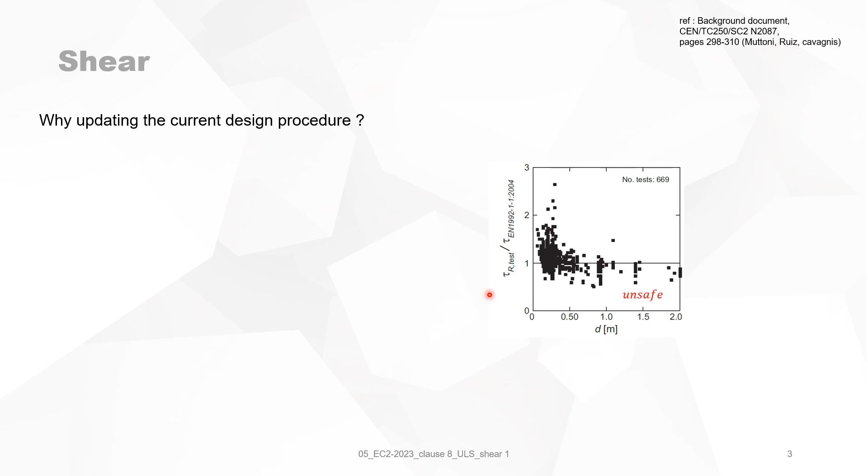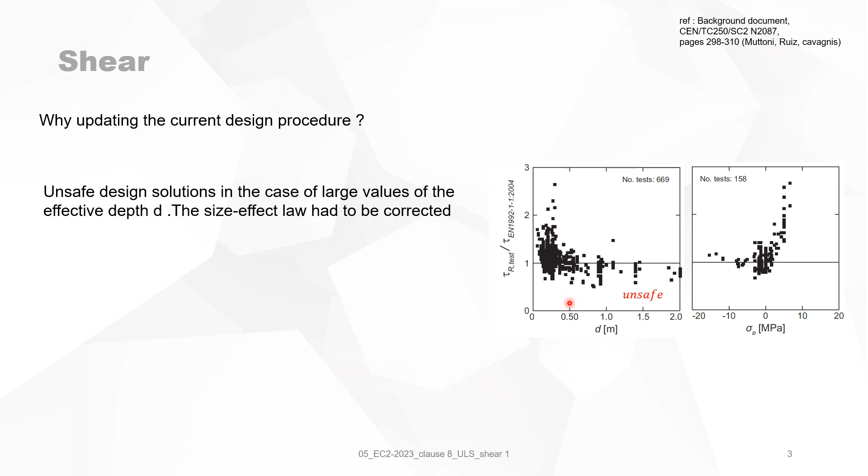On the other hand, when we have tensile forces, and you look again at the shear stress, you will see that this is too pessimistic, too safe, and too conservative for members subjected to axial tensile stresses. So that's in a quick way to explain why we need an update of the current procedure.

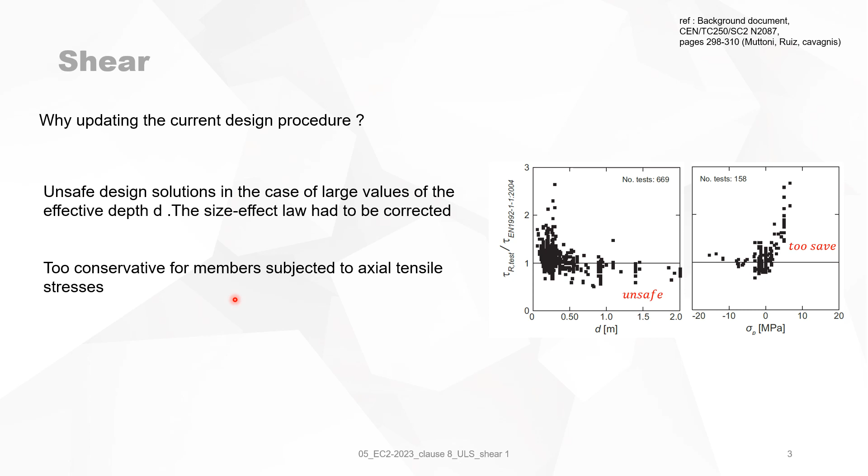The aggregate size, DG, which governs the aggregate interlock capacity, was neglected in the 2004 code.

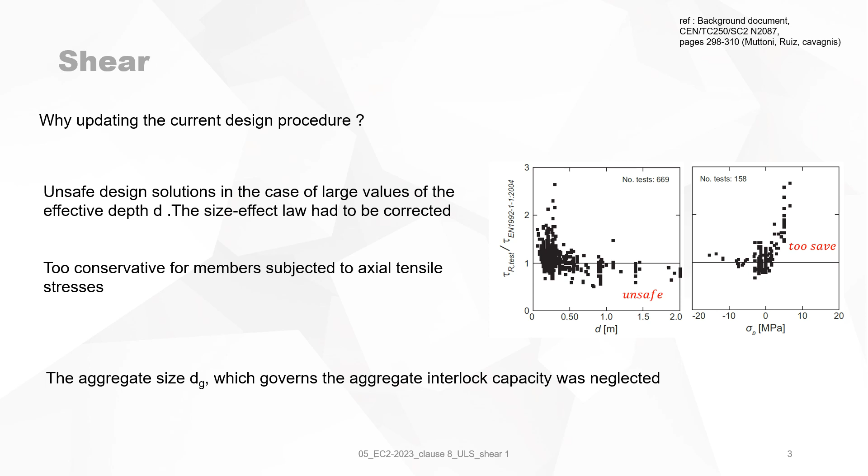So in the code of 2023, the shear resistance is based on the critical shear crack theory. We will first give you an overview of the procedure.

The first step in this procedure is that a detailed verification of the shear resistance may be omitted, provided that the applied shear stress is smaller than a minimum shear stress that the concrete can take. This first step is new, something which is not existing or not directly existing in the present Eurocode.

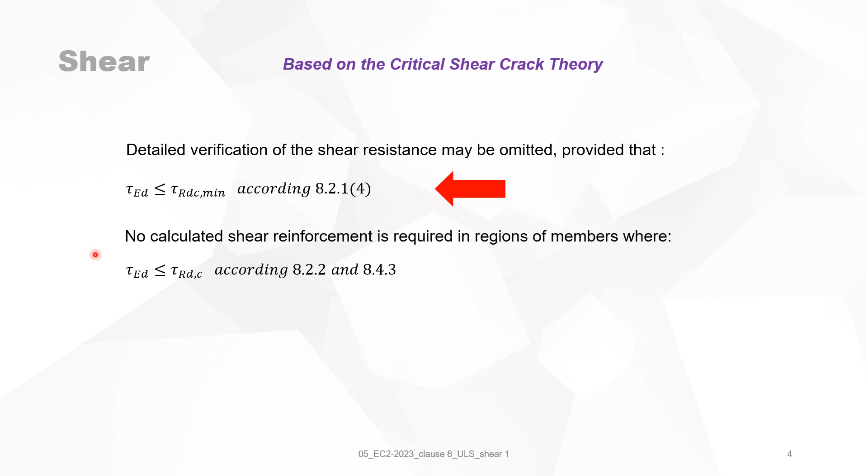The second step is that no calculated shear reinforcement is required in regions of members where the applied shear force is smaller than the shear force that can be taken by the concrete alone. Then the third step, if this is not the case, then you should apply shear reinforcement and make sure that the applied shear stress is smaller than the resistance shear stress.

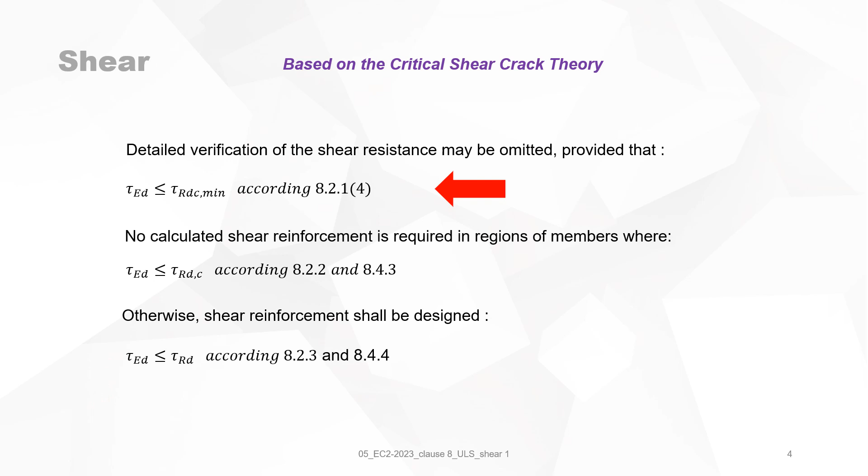First thing that we have to note is that we are talking in shear stress. We are not talking in shear force. That's also something that they put through in a consequent way.

The critical shear crack theory is based on a shear crack criterion, and this criterion is derived as follows.

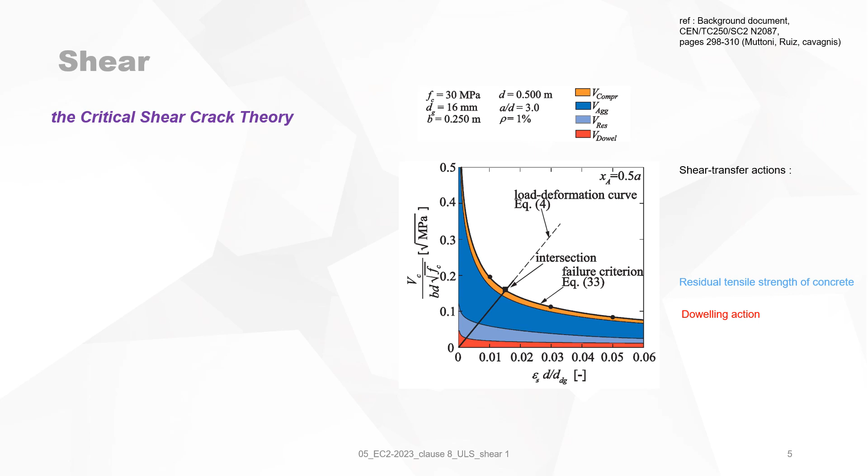So now this resistance of the concrete alone to the shear force is due to dowel action, of course, of the longitudinal reinforcement, the residual tensile strength of the concrete, and then the dark blue is the aggregate interlock, and the fourth contributor is the compression zone of the concrete.

You will see here the different input data to obtain this curve.

So this is a failure criterion, and this failure criterion can be written as what is stated here: Vc over Bd, which is the shear stress, is proportional to the square root of the concrete compressive strength multiplied by a function, and this function depends on the crack width and the maximum size of the aggregates.

The crack width, the critical crack width, is proportional to the strain multiplied by the effective depth, the strain of the longitudinal reinforcement multiplied by the depth. All this is based on this reference background document.

Fc is the concrete compressive strength, dg is the maximum aggregate size, W the critical shear crack width, and Vc is the shear strength without transfer reinforcement. Transfer reinforcement is the shear reinforcement, it can be stirrups or bent-up bars, and you have longitudinal reinforcement and transfer reinforcement.

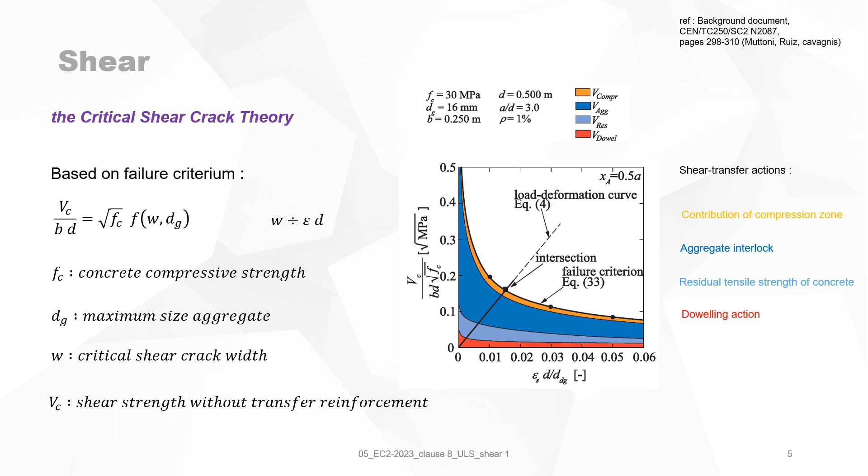The applied shear stress is equal to the shear force divided by BW and 0.9D, which is the well-known formula of Professor Walraven.

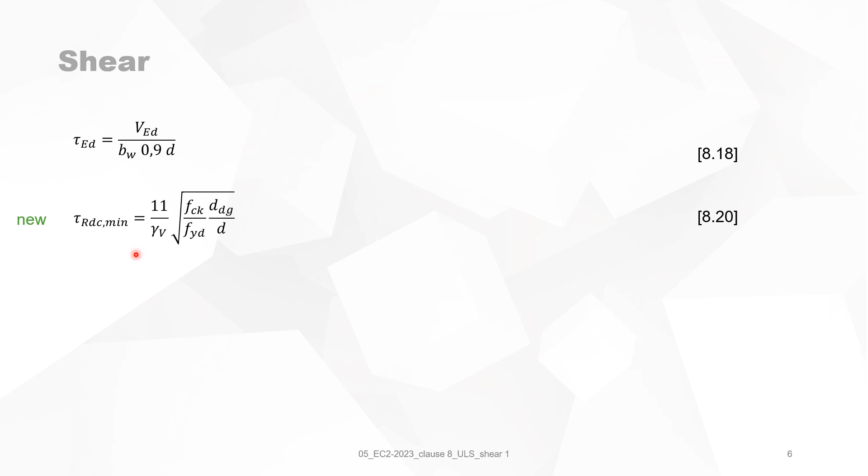What is new in the code is the next step: the definition of the resistance of the concrete, the minimum resistance of the concrete, which is equal to this formula.

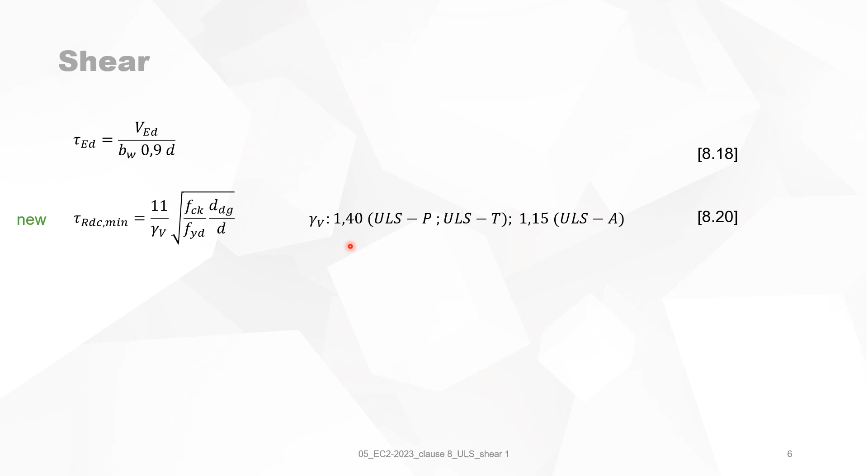We see that the material coefficient of concrete, gamma V, is different for shear force than for other situations. Gamma V is now 1.4 for ULS persistent and ULS temporary, and 1.15 in ULS accidental. This differs from the well-known material coefficients for concrete, which is 1.5 and 1.2.

It is also strange that there is a combination of a characteristic value and a design value. I do not understand why it is not the characteristic value of the concrete and the characteristic value of the steel, the reinforcing steel, why is it a mix? You could also, for instance, take FCD instead of FCK, that would be fine too. So why is the difference there?

DDG is the factor taking into account the value of the coarse aggregates. It is based on 16 millimeters plus the Dlower. 16 millimeters was the standard aggregate size where the whole system was based on.

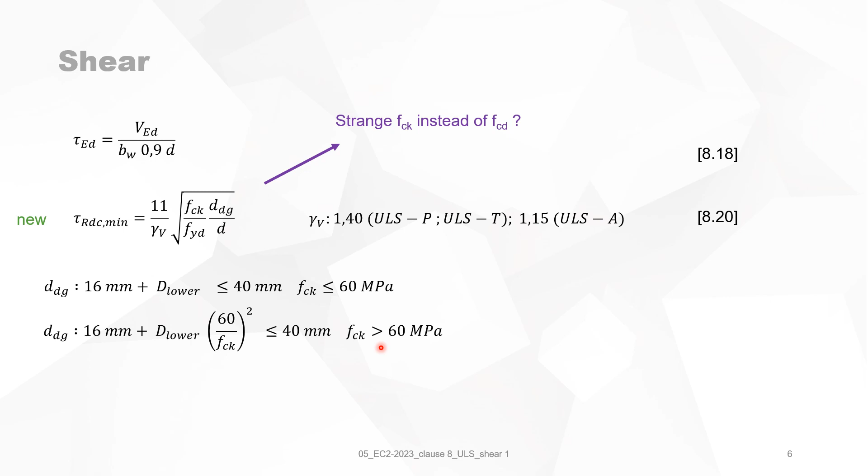The Dlower, we'll come to that just now to explain it. 16 millimeters plus the Dlower must be smaller than 40 millimeters for a concrete quality smaller than 60 megapascal. When the characteristic value of the concrete compressive strength is bigger than 60 megapascal, then you use this formula for DDG.

Now, the Dlower is something that did not exist in Eurocode 2 of 2004. The Dlower is the smallest value of the upper size D in an aggregate for the coarsest fraction of aggregates in the concrete. So you will see that the Dlower is not always known. It's not known for existing structures, or most of the time it's not known in a design phase.

So it's a bit of a problem to give a certain value to the Dlower. Interesting to know is that the Dlower has an influence on the total resistance of the concrete against shear. The lower it is, the less resistance you will have. So we recommend using Dlower equal to 16, which gives you a safe assumption on the resistance of the concrete to shear.

Eurocode 2 of 2023 says that in case Dmax is known, which is in most cases, because it's related to environmental impact or environmental protection, then the Dlower can be replaced by Dmax. So when taking Dlower equal to Dmax, it's clear for the designer what to use for Dlower. But again, if there's any doubt, take Dlower equal to 16 and you are on the safe side.

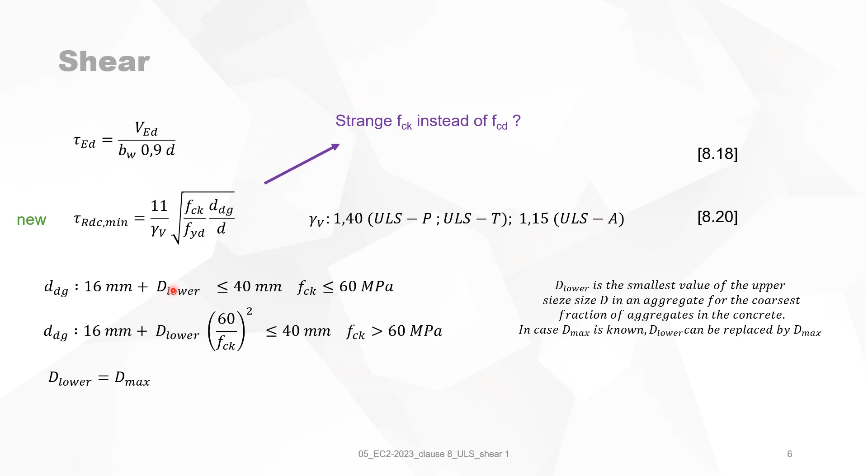In planar members, the design shear force per unit width is given by this formula. It's the square root of the shear stress in the x direction plus the shear stress in the y direction. This is new, this was not previously stated in Eurocode 2. This is not the same as punching shear, it's different than punching shear. I'm talking here about design shear force per unit width.

The effective depth is then given by this formula, and the angle alpha V is the tangent of the angle, the proportionality between the shear stress in the y direction and the shear stress in the x direction.

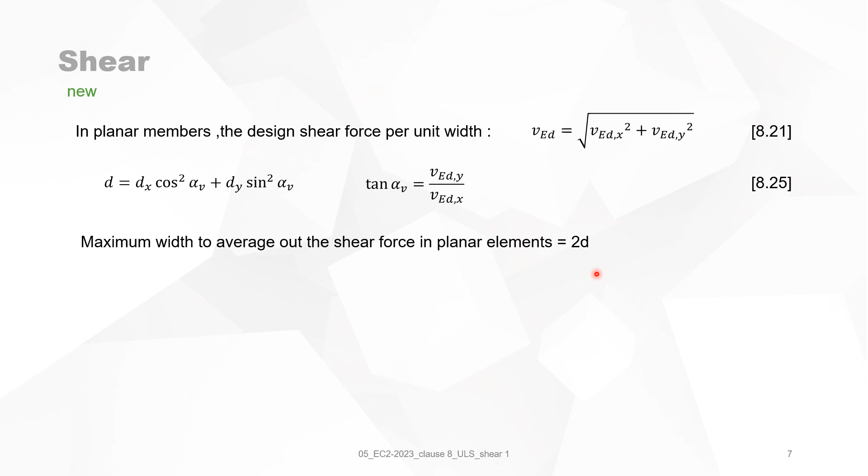What is interesting is that the maximum width to average out the shear force in planar elements is equal to 2D. So when you are using finite element methods and you have to read out the applied shear force, you know that you have a maximum distance of 2D that you can average out over.

Here you make a combination of the applied shear stresses to obtain a shear stress, and this shear stress will be needed to design the shear reinforcement. But in which direction is it? Is it only valid for shear reinforcement in X direction, which is equal in Y direction? It is not very clear.

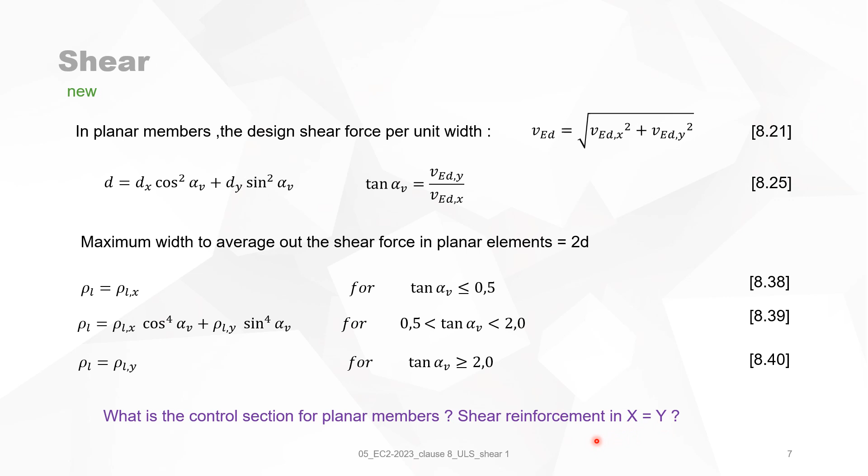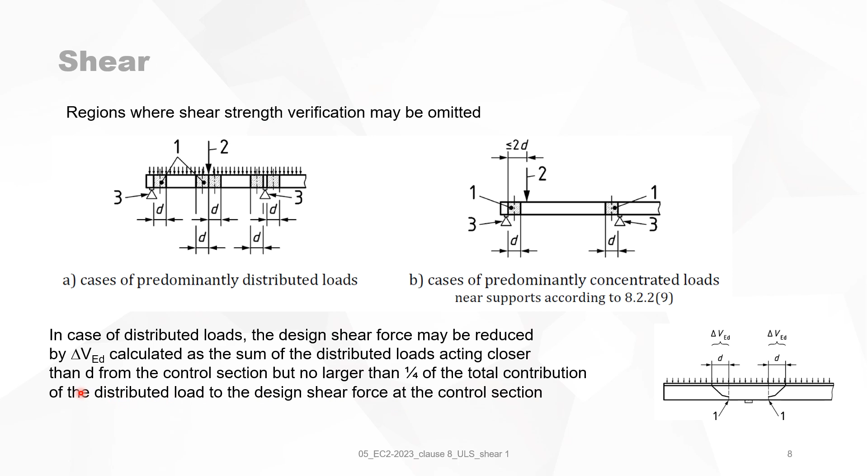You can also translate this into a formula, but be aware this is not a formula from the code, it's just a translation. Delta VED is then the minimum of VED divided by 4, or Q times D.